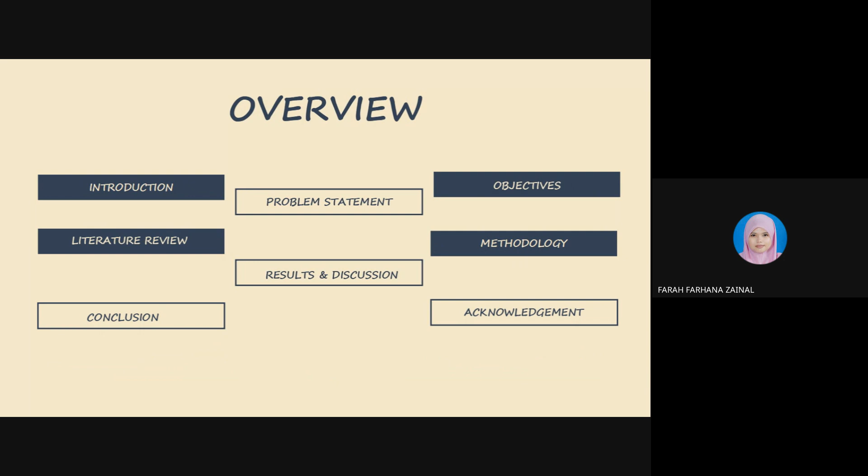So today I would like to share my research work. The title is The Effect of Primer Layer and Curing Method on Geopolymer Paste Coating Properties. So this is the overview for my presentation today. I will start with the introduction, the problem statement, the objective, the literature review, methodology, results and discussion, conclusion, and acknowledgement.

For introduction, geopolymer technology has emerged as a sustainable and cost-effective solution with numerous advantages over traditional cement-based materials. And geopolymer coatings also have gained attention for their superior performance and environmental benefits in various applications such as petrochemical facilities, industrial settings, improved resistance to chemical attack, and higher thermal stability.

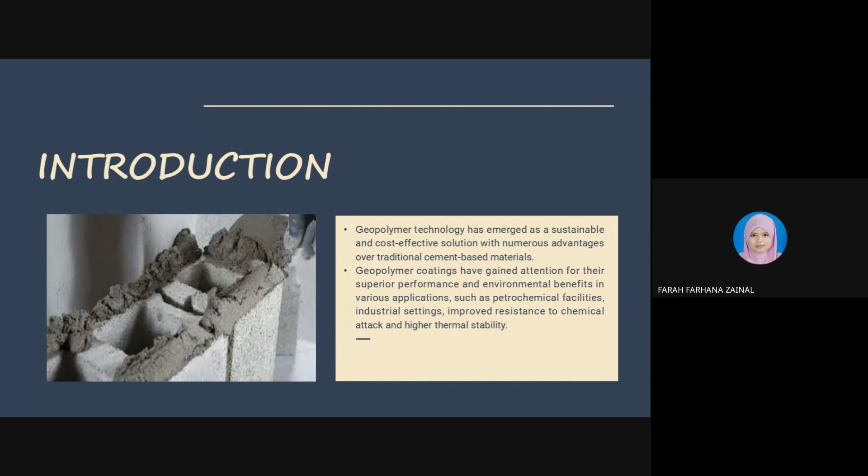So, this is the problem statement. Mild steel pipelines, as we can see from the figures, used for transporting liquids and gases are susceptible to corrosion when exposed to the surrounding environment. Corrosion compromises the pipeline structural integrity, wall thickness, and overall strength. Proper corrosion protection measures are crucial to ensure the longevity and reliability of these pipelines.

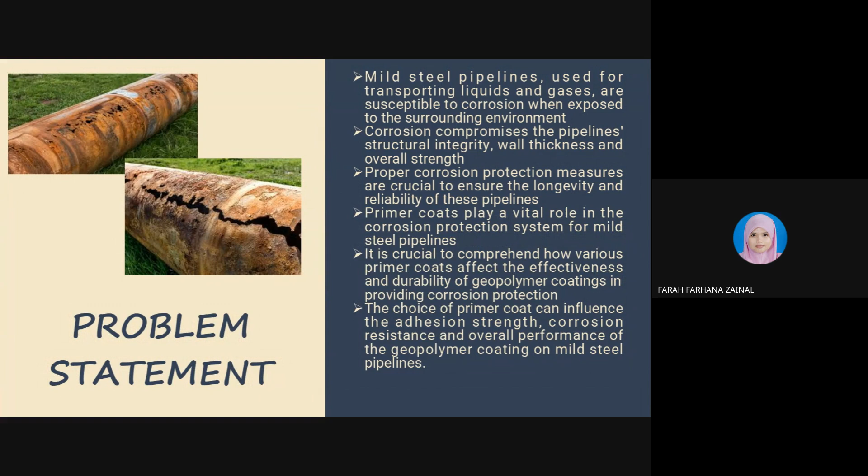Primer coats play a vital role in the corrosion protection system for mild steel pipelines. It is very crucial to comprehend how various primer coats affect the effectiveness and durability of geopolymer coatings in providing corrosion protection. So the choice of primer coat can influence the adhesion strength, the corrosion resistance, and overall performance of the geopolymer coating on mild steel pipelines.

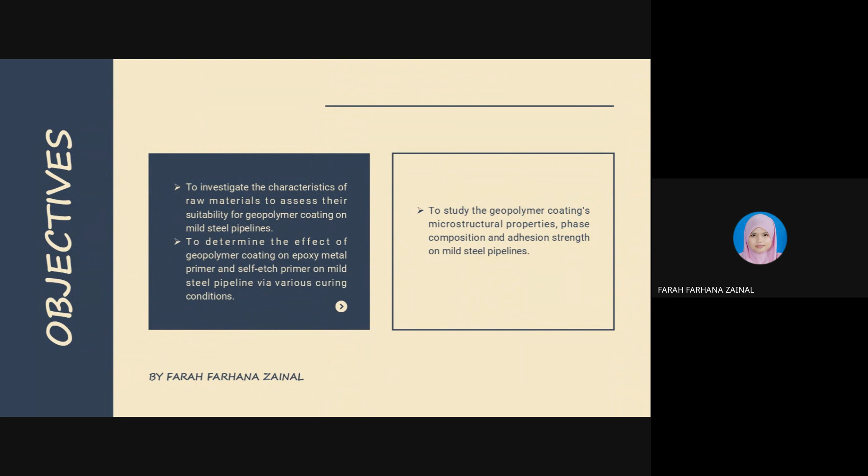So these are the objectives for my research work. The first one, I would like to investigate the characteristics of raw materials to assess their suitability for geopolymer coating on mild steel pipelines. The second one, to determine the effect of geopolymer coating on epoxy metal primer and self-etch primer on mild steel pipeline via various curing conditions. And the last one is to study the geopolymer coatings' microstructural properties, phase composition, and adhesion strength on mild steel pipelines.

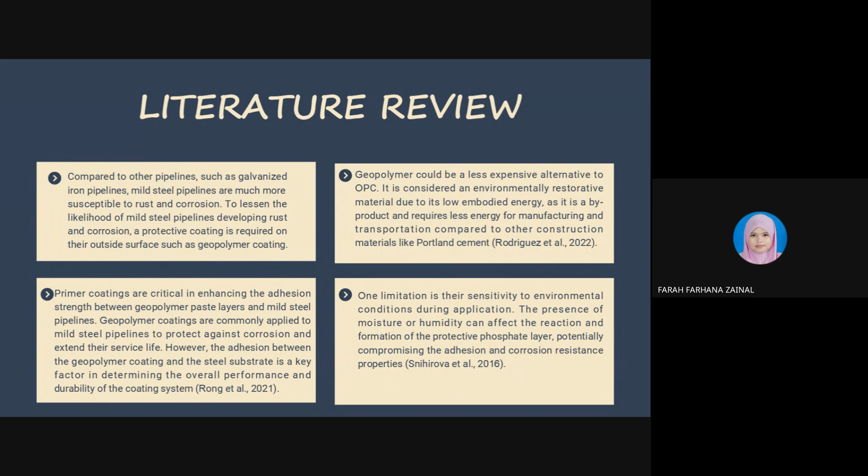This is the literature review for my research work. So compared to other pipelines such as galvanized iron pipelines, mild steel pipelines are much more susceptible to rust and corrosion. To lessen the likelihood of mild steel pipelines developing rust and corrosion, a protective coating is required on their outside surface, such as geopolymer coating.

And geopolymer could be a less expensive alternative to ordinary Portland cement. So it is considered an environmentally restorative material due to its low embodied energy, as it is a byproduct and requires less energy for manufacturing and transportation compared to other construction materials like OPC, ordinary Portland cement.

And the primer coatings are very critical in enhancing the adhesion strength between geopolymer paste layers and mild steel pipelines. And geopolymer coatings are commonly applied to mild steel pipelines to protect against corrosion and extend their service life. However, the adhesion between the geopolymer coating and the steel substrate is a key factor in determining the overall performance and durability of the coating system.

And one limitation is their sensitivity to the environmental conditions during the application. So the presence of moisture or humidity can affect the reaction and formation of the protective phosphate layer, potentially compromising the adhesion and corrosion resistant properties.

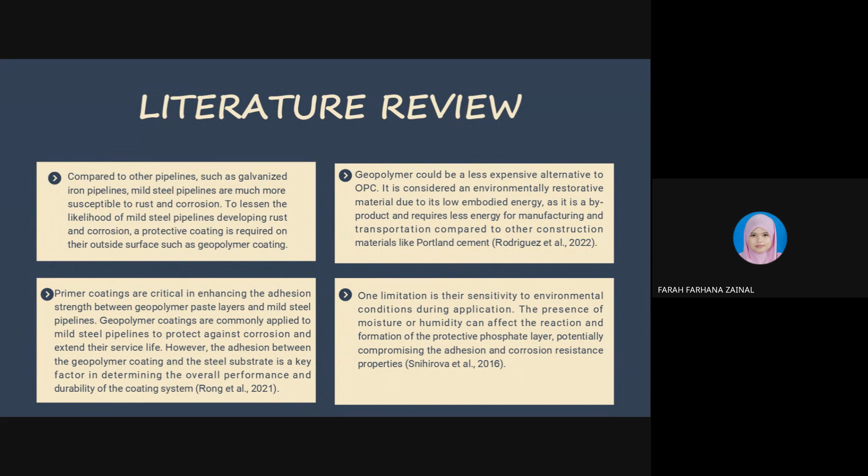For the methodology, this study explores the impact of primer coats on the properties of geopolymer coating used on mild steel pipelines. So the goal is to find the most practical combination of primer coats and geopolymer paste to enhance the corrosion protection. The findings will contribute to developing effective corrosion resistant solutions, prolonging the service life of pipelines, and reducing maintenance

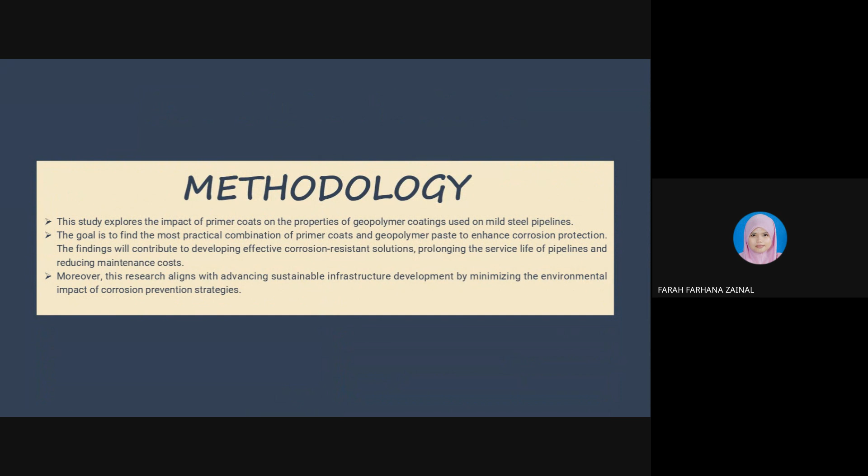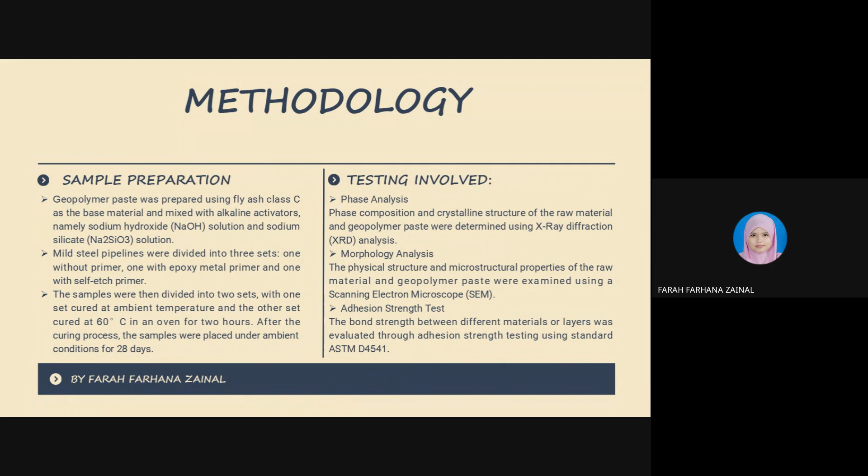And then mild steel pipelines were divided into three sets: one without primer, one with epoxy metal primer, and the last one with self-etch primer. The samples were then divided into two sets, with one set cured at ambient temperature and the other set cured at 60 degrees Celsius in an oven for 2 hours. After the curing process, the samples were placed under ambient conditions for 28 days.

So after 28 days, the testing for phase analysis, morphology analysis, and adhesion strength analysis were involved. For phase analysis, phase composition and crystalline structure of the raw material and geopolymer paste were determined using XRD analysis. For morphology, the physical structure and microstructural properties of the raw material and geopolymer paste were examined by using scanning

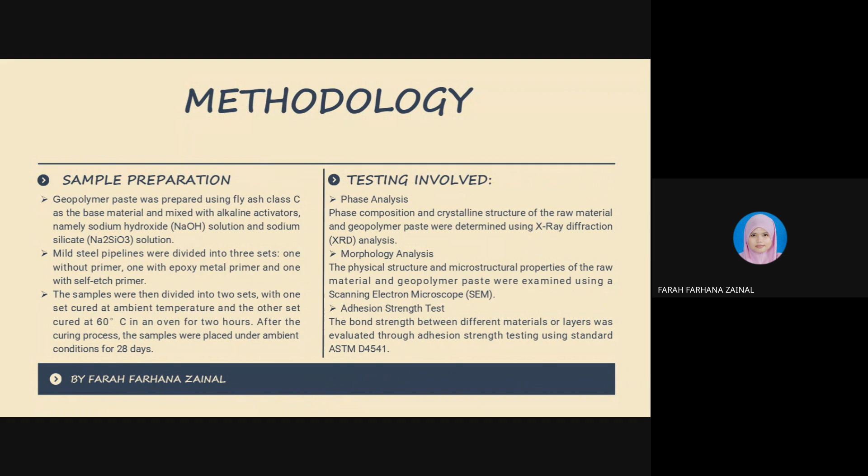electron microscope, SEM. And the last one, adhesion strength test: the bond strength between different materials or layers was evaluated through adhesion strength testing using standard ASTM D4541.

So this is the results and discussion for phase analysis. As we can see, we ran the XRD analysis of fly ash, samples cured at ambient temperature, and samples cured at 60 degrees Celsius in oven for 2 hours. For B and C, the blue color is self-etch primer, the red color is epoxy primer, and the black color is without primer.

From the XRD analysis, we confirm the presence of quartz, magnetite, aluminum oxide, and mullite in the geopolymer coating. So the self-etch primer coated sample shows the formation of iron oxide particles through chemical precipitation.

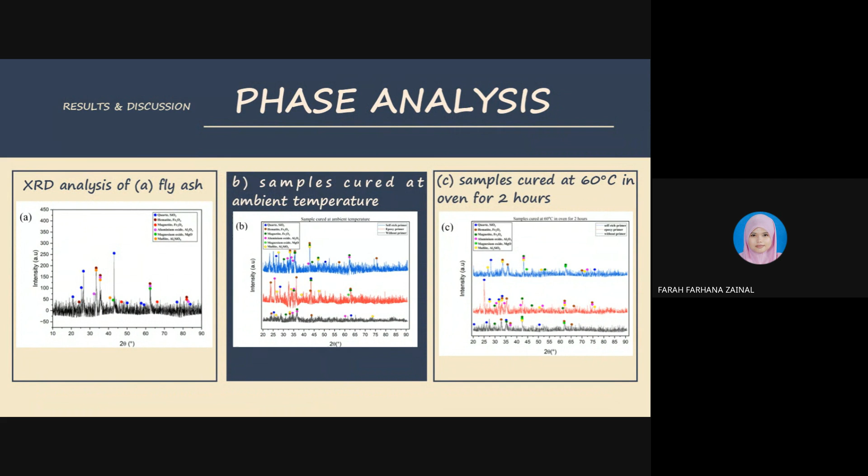Then this is the morphology analysis. As we can see from the morphology analysis, A is the fly ash sample, B is without primer, C is with self-etch primer, D is with epoxy metal primer, E is without primer, F is with epoxy metal primer cured at 60 degrees Celsius in oven for 2 hours.

So from the figure, the microstructure analysis of the geopolymer coatings on mild steel pipeline as observed in the SEM micrographs provides valuable insights into their characteristics. Similarly, the sample with epoxy metal primer also exhibits a combination of unreacted fly ash and geopolymer paste, indicating a more cohesive structure compared to the sample without primer.

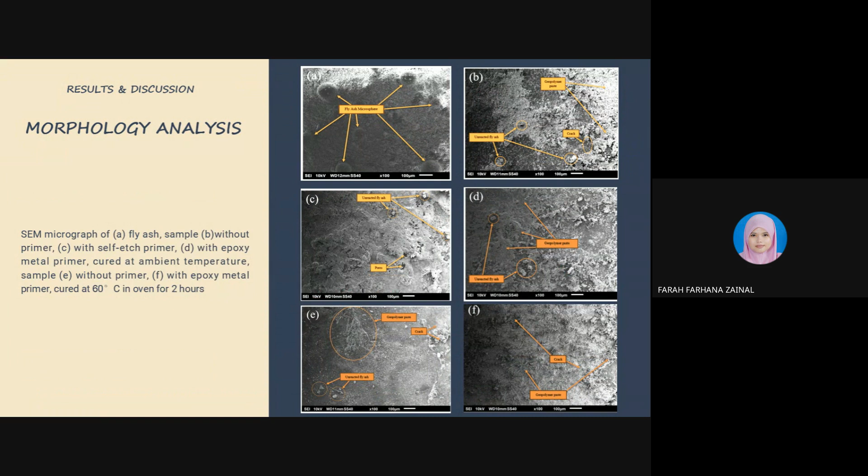As we can see, for B, C, D, and E, there is unreacted fly ash in these SEM results. But in the SEM micrograph of the sample with self-etch primer cured at 60 degrees Celsius in oven for 2 hours,

the SEM analysis demonstrates that mild steel pipelines coated with self-etch primer greatly influence the microstructure of geopolymer coatings. It reduces the presence of unreacted fly ash, promotes the formation of dense gel matrices, and enhances the binding of quartz powder. These improvements suggest that geopolymer coatings cured at elevated temperature have the potential to exhibit superior